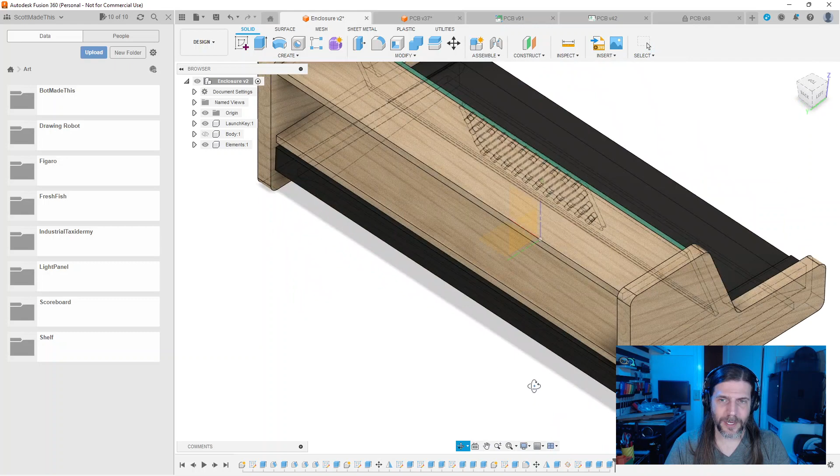To get a little bit more Jetsons-y. There's still work to do on that, but I think the overall look of it is so dramatically improved from this angle. I think we want to take that angle, whatever that angle is. I think we want to find it here as well. Not 1,000% sold on it, but I think that's something we want to do.

Two big things to address. There's certainly some more visual tuning that will just be a thing that continues in life. I kind of like that this pairs with this, that feels pretty intentional, but it's still a little too shoe-like or something. There's just something, I don't know, maybe it's fine actually. Definitely getting to second, third, fourth, and fifth guessing.

Some things we absolutely have to address though, some things critical to address. The most broken thing is there are little knobs in here and there's not enough clearance, so that's the thing that just absolutely has to be addressed. That is a failure, so we need to address that failure.

The second thing is an assembly strategy I was thinking about this morning, because joinery like this sucks—just a butt joint, a big flat plane, perpendicular is not great, especially with thin supports like this. There's a billion ways to do it and line it up and clamp it, but I could also make my life easier by building in some fastening positions, which will also help with fastening a front and back panel. I have an idea to do that, I don't think it'll be too terribly complicated.

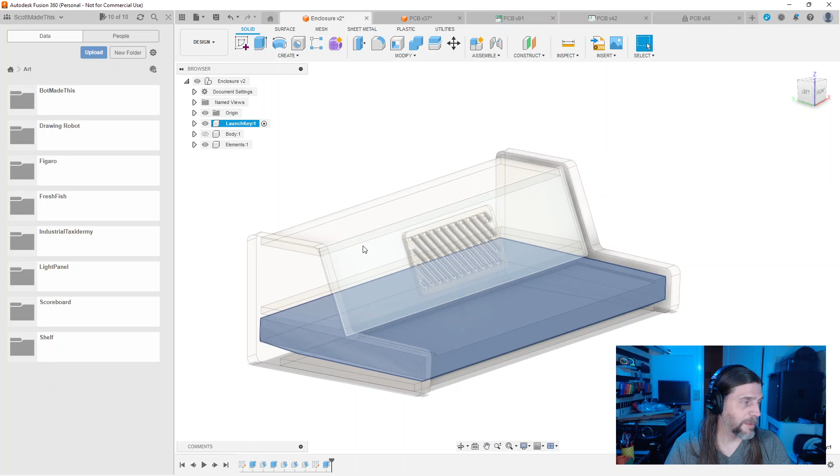Obviously all the Sudoku people are watching Skojo, as they should be. So we want to revisit this. I'm not sure why it's okay.

Anywho, so we ended up with two bodies here. One is the lower, one is the upper. Now I think we want to think about the placement of the knobs, and I think we want to do it relative to this surface. So I think we want to sketch just on this surface, just because we know it's at an angle, et cetera.

Top is not going to be right though. Actually, how do you do this? When you have made a surface like this, how do you frame it properly? Normally if I just go into the sketch, it will auto frame it. I don't know how to actually redo the frame because we're not looking straight down here. There's a little bit of an angle. I don't know how to do that.

Anywho, let's think about this. Fusion's going up in price next year. I should have purchased, especially now that... actually that would not be an unwise thing to do probably. Shoot. Yeah, bummer. Like I could buy it at the full current price, but there's no deals. Maybe there'll be a Christmas miracle deal. I definitely should have purchased this a month ago when it was half price, because now the half price deals are not going to be very good. Shoot. The good news is I don't have to pay for Unity anymore, so that's great. Still pay for Adobe, which hurts my feelings every day, because Adobe sucks.

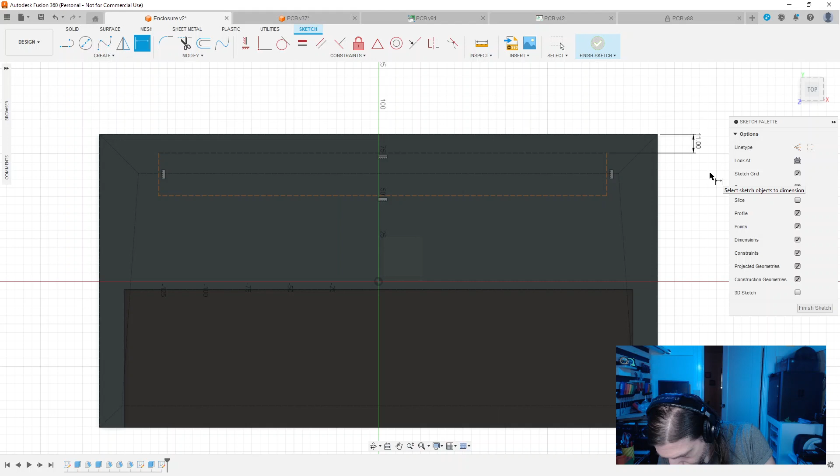So I'm going to exaggerate whatever I end up with anyway. So we want 11 millimeters from the top. We want something like, well, 81 millimeters from the side, from this side. And then this side. I don't think they're symmetrical, but maybe they are. They are not at all symmetrical. They're decidedly unsymmetrical. This is more like 84 millimeters on this side, 81 millimeters on this side. It's really like 81 and a half, but hey.

So 84 millimeters. And then the height of these to the bottom, a little hard to say. Let's say something like 9 millimeters. So that is kind of the layout of where these exist.

Do I want to actually bother trying to make some little knobbies here and extrude them, or do I just want to extrude this? I don't know. I don't really know the best way to do this. So if this was 9 millimeter, we could probably do something like this and something like this.

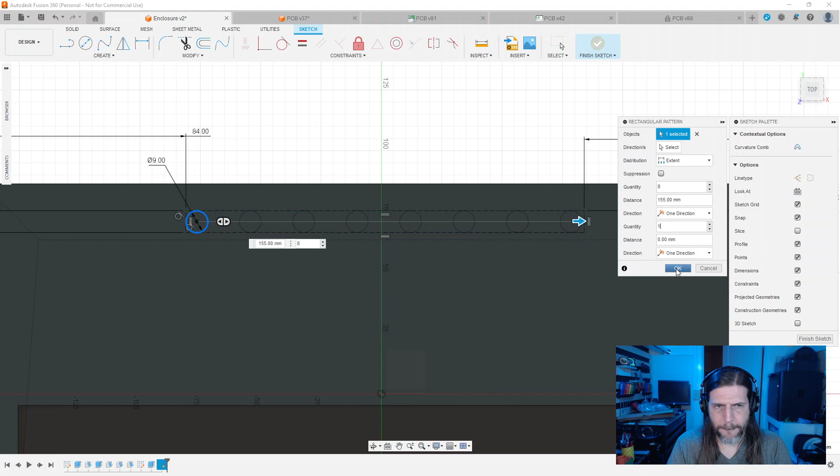Somehow that doesn't look right. Why doesn't that look right? Maybe it's right. That looks further apart than these really are. So that's 22.2 mil between. That's not even kind of right. What have I done?

So 8 of these, there's 8 of these, the full width of the whole party. Do I have some other measurement wrong? That would be amazing.

Let's try this again. That edge to edge is something like 81. This edge to edge is something like 84. That means this middle portion from here to here... Maybe I have the overall dimensions wrong and my whole thing is wrong. That would be kind of cool. 165. That doesn't seem right.

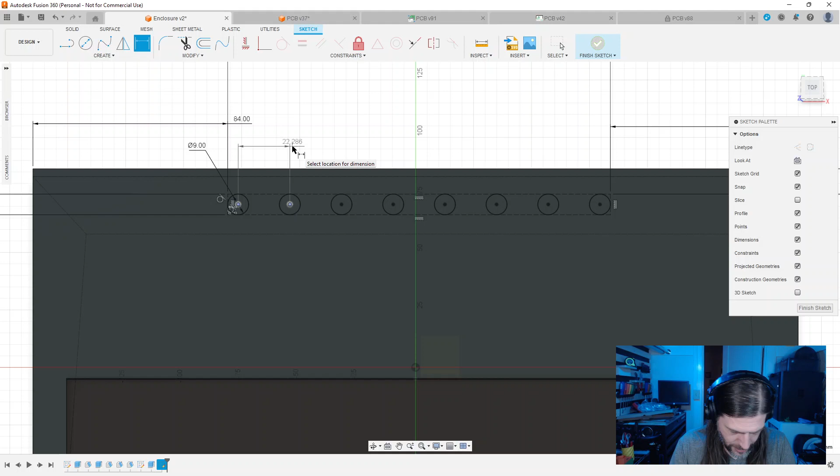So what, that should be 22 center to center. Maybe it is. Maybe this is right, 22 center to center. Maybe that's what I did wrong a moment ago. No, that actually seems right. Okay, 22 center to center.

Okay, never mind. Everything's perfect. I guess that helps reinforce my other measurements.

So the height here is what we're really concerned with. And the height is again something like 9 mil.

And this is where we're gonna see our sadness now, when we try to look at the whole dude, because I think we're gonna have a lot of intersection back here. And we do. Really bad. Super duper bad.

So we have a few options on this. One is to reduce, just make the bottom shelf not extend back that far. Or even have like a little cutout or something where those go, is one possibility. That makes that piece a little more annoying. I mean, otherwise if it's just a rectangle, it's easy to cut on the table saw. If I have this, suddenly dimensions matter a little more. Maybe cut it on the router.

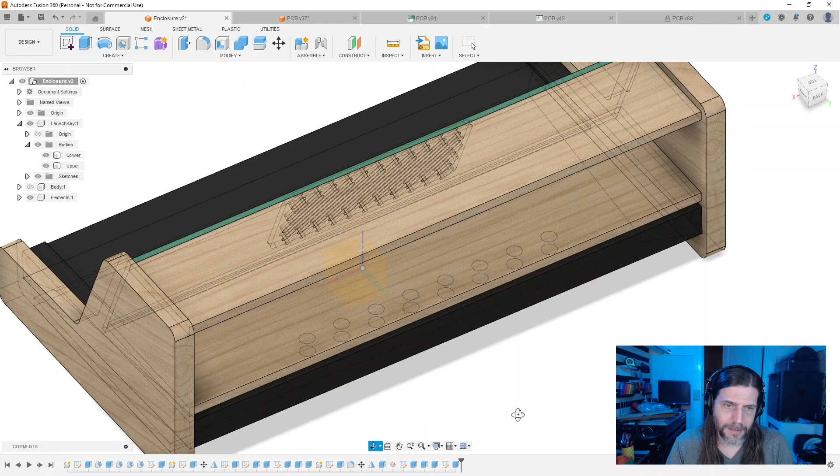I actually don't really want to raise it a ton, because that's going to make this internal height, which I hopefully get that part today, to think about what I want that height to be. But I would sort of prefer - so either this goes up or there's a cutout, I guess, is the takeaway here. But going up, it's definitely not ideal.

What do we want to do here? Could also just make this piece have less depth, which is a maybe. But then if we wanted to fasten something on the back, or I don't know. I'm also slightly worried about this dimension.

Is that a straight line, actually? So I'm just thinking about where a Raspberry Pi sits, and then really where the battery pack sits, because that is going to be big. What is this dimension? Oh, that's not right.

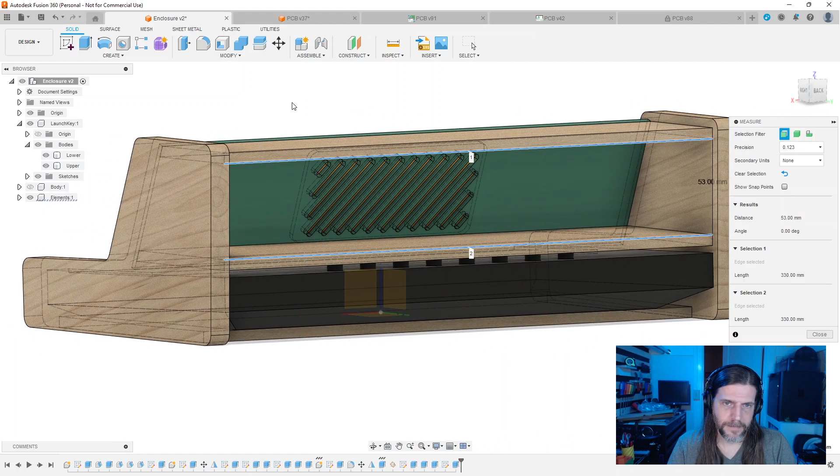Could imagine trying to mount all the electronics on the front panel. The angle that it comes in is a little obnoxious. Like the footprint of a Pi is something like 60 millimeters ish on the short side.

Gosh, this is way smaller than I think it is, isn't it? This height, I think, is actually a lot smaller than I imagine it is.

Because even this Raspberry Pi on its side, that's 53 millimeters tall. Raspberry Pi, if you count for the ports - sorry, even not accounting for the ports - is something like 56 tall on the short side, and then the long side, just the board is like 85. But once you account for clearance, it's close to 100 millimeters. Just if you want clearance on the sides, and if you go this way, it's like 100 by 60 or something.

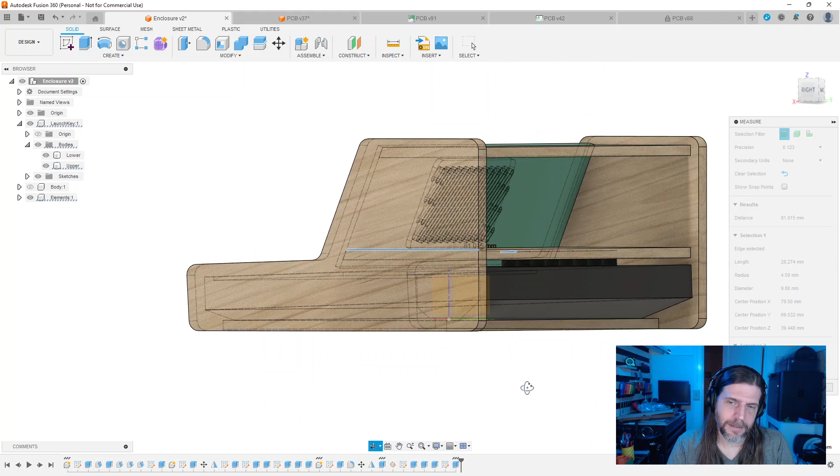Like, two things, I guess. This almost certainly needs to be taller, which is kind of a maybe. We've got to do something about this thing, right? Something has to happen with this - that's a requirement here. And then once that happens, we need to, whether it moves up or we do a cutout, think about the internal space we have here.

But there's really no reason that this can't come out substantially, right? Like this back piece comes out even more. And the reason I kind of like that is we know we have a minimum of one wire coming out of this object. And it's a big fat USB-B cable as well.

So, are there right angle USB-B connectors? Probably. Yeah, but I don't want micro USB-B. I want just, we need something like this, but we want it to be very short.

So we want something like this. Is that the actual angle that we want, though? We want something that goes up, and I think we want the exact opposite of this, unfortunately. That angle's down. We need to angle up.

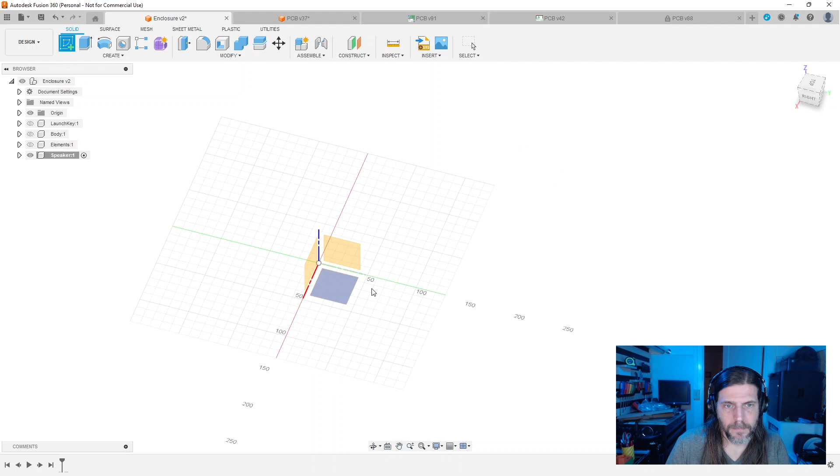Wish I could do. Can I do this? I want to. Anyway, we then need... just a rectangle. No, center rectangle. So this is 1.8 inches, and this is 7.2 inches, and then we need to extrude up 2.2 inches. So this is basically the footprint of this.

There's certainly a big fillet on these sides, like a really big fillet. Maybe not that big. But something like this, I think, is roughly the speaker. And then the cable comes out somewhere. Who knows where? Probably dead center, if I had to guess.

Why does this not give me a... Oh, it does. I can just barely see it. Love these setups. Love everybody's setups. Does anyone show the back of this thing?

Is that old versus new? Oh, the Bluetooth, I don't think I got that. Oh, an Anker brand. That one costs more. What are we looking at? Oh, it's Netflix. Does no one show the back of this object?

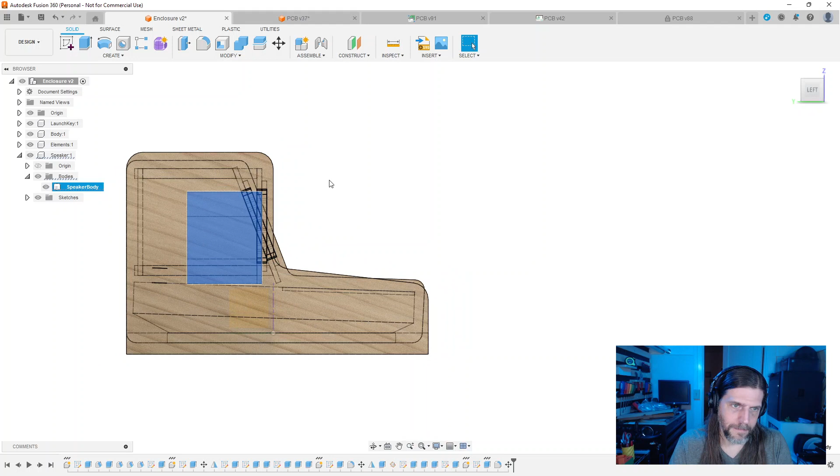Let's switch here. Move a whole component. So we're not outrageously off, surprisingly, just in terms of the height. This is a bit annoying.

Like, I do really want that angle, but we do have to make some sacrifices if we choose to do it. Yeah, and we eat up a bunch of internal volume as well. But it's honestly not as bad as I thought it was going to be. We have to make up this height somewhere.

So we need a little more height, and we need to lift that bottom piece. And we gotta think about where the battery goes. Like, I would want to put the battery just behind here, but I don't know — probably the wire just comes straight out of the back in a really annoying way, where it will be annoying.

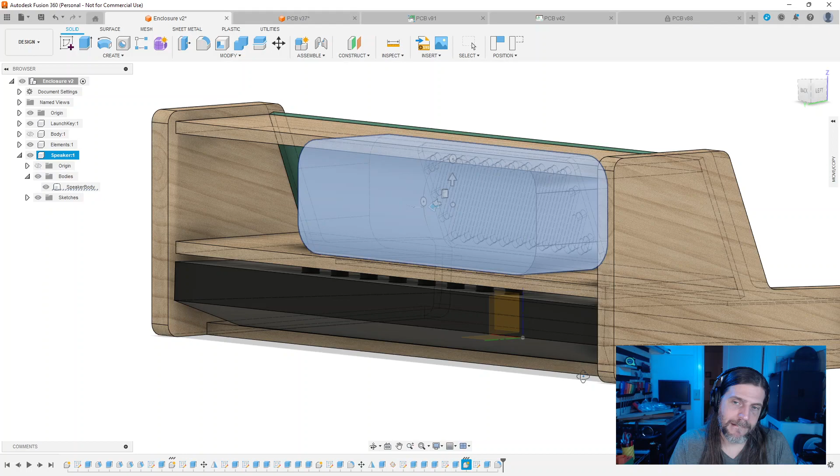That's another possibility, which is sort of tempting. Ugh, sad story. Just thinking about what it would take to have this flush, and then we can — but then, again, this still needs to move up. Or I guess it doesn't technically have to, but you know what I mean.

Oh, something just occurred to me, something possibly better. We will still have some internal volume problems, but I was just thinking, what if we didn't have this bottom shelf at all, and instead had some way to affix everything to the upper, with this upper angled on top. I don't know if any of that made sense.

Say we did something like this, where we still have some clearance. I think that angle is quite right, though I don't remember what we made that angle. Nobody does. Sort of afraid of that. What did we make that? It's maybe something silly.

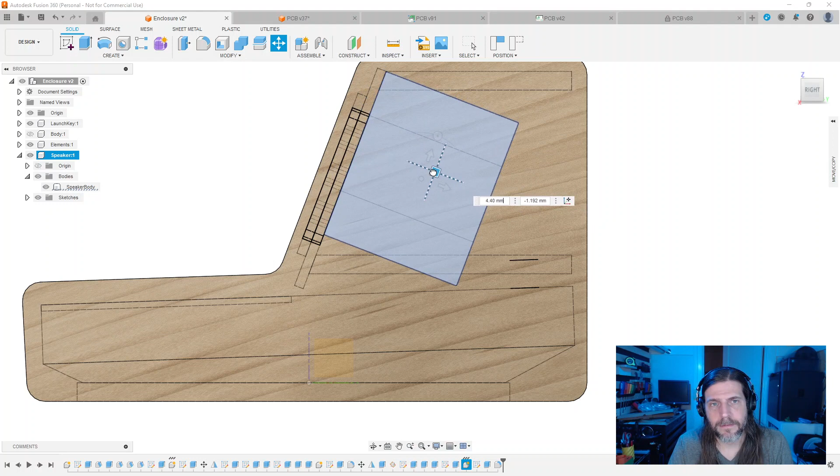Something like that. Anyway, I was just thinking about something like this. It does mean we'd need a way to suspend this, which would be possibly a little annoying, and that definitely complicates things. But it lets that kind of live more directly behind the grill.

It does complicate things. I don't know, kind of like that, but it definitely complicates the construction in a way that I'm not jazzed about. This just gets silly, and we don't have a bunch of open air visible behind the grill. It definitely was easier when the front was flat, but it didn't look as nice.

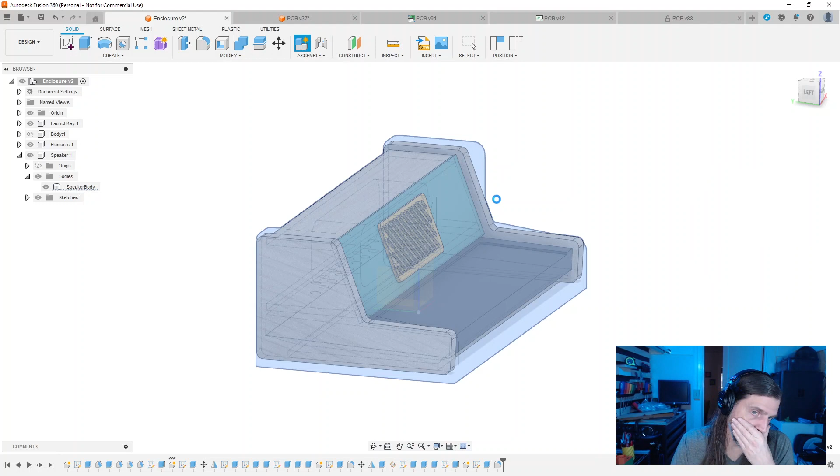So I guess let's just make the battery. Oh, that speaker takes up so much room. I already forgot what I said. 6 by 2.7, what? I don't know what I just did. I think it was related to moving the speaker, but that was not a good position anyway.

So we said 2.7 inches by 6 inches, extruded 0.7. And then we'll give it some fun fillets just for kicks, not terribly filleted, but... so then we had to put this dummy somewhere. Where does it go? It's a mystery.

That's funny that you think you live up here. Okay, ignoring the angle thing because I just don't know what to do. Oops. At this moment... I mean, ignoring a lot of things, a lot of flaws to ignore here.

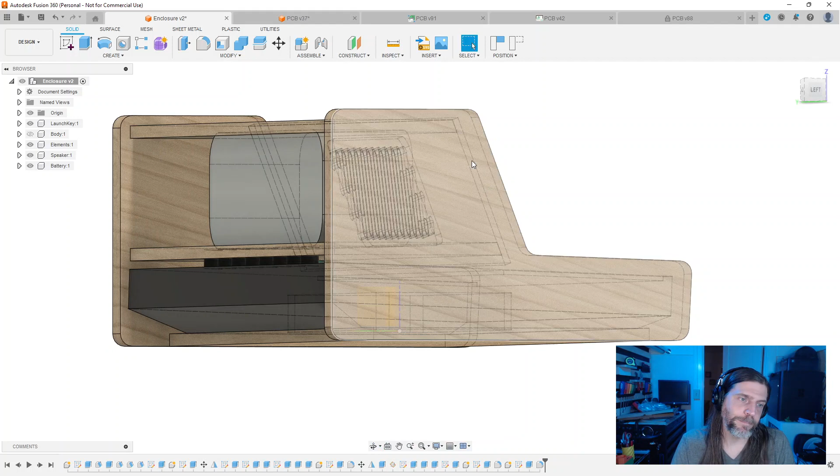And then the dumb battery, which is giant also, needs to be up in shelf land, and oh boy, it's big. See, I kind of like this thing. That is an idea, to use this as the size of what the height has to be. Other option is that the battery sits on top of it, and then that internal cavity has to be even bigger. Another option is this is just huge back here. I don't know.

Another option that I hadn't considered until this very moment—I don't really want to do this, but just to think through it for a second—maybe that's not the worst idea. Basically there's a panel on the whole back side of this, and this would live on the back with the Raspberry Pi, etc. That is a pretty efficient use of space.

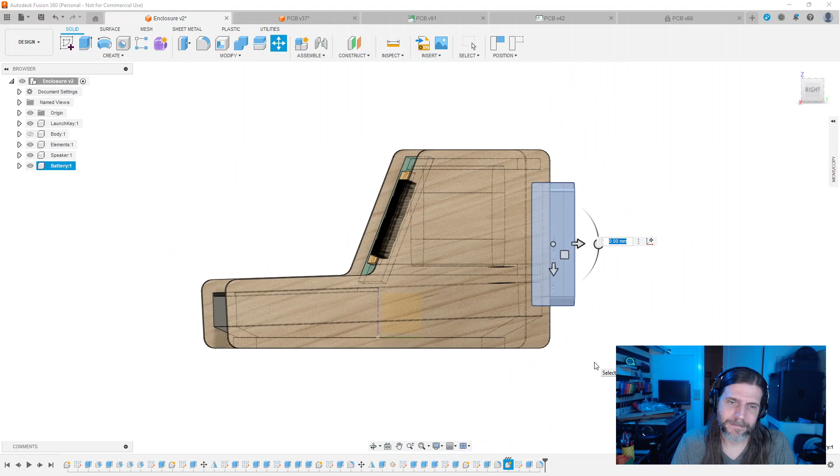But then everything else has to extend so it could be hidden. This still isn't solving some of the deep-rooted problems that still need to be solved, but, just spitballing here.

Shoot, I lost my battery move. You could kind of imagine this shelf. How would we do this? So one problem we have is just interference with these, right? So one idea is just cut that off early. Make this taller.

And the battery lives somewhere. Just don't want to add a ton of complexity to this. I like the idea of just having this cavity to stick stuff in, but maybe our stuff is too big.

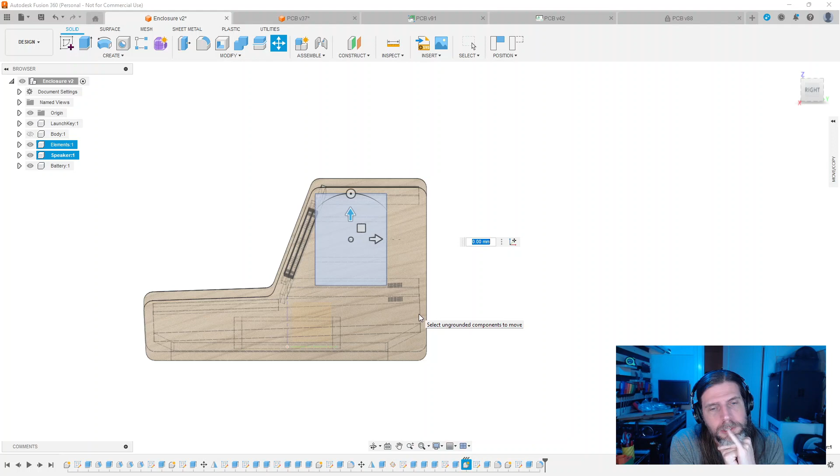We do still have the annoying issue of the knobs, which is an issue we haven't really talked about. Yeah, I talked about it but didn't address it. Like the joinery for this bottom piece, the joinery for the pieces that go in here, that stuff is still annoying. And we still haven't really talked about the idea of having other electronics on the front panel.

I guess we have a slight advantage of this little trough here if we wanted to do stuff in there. You could even imagine just like a slot where those knobs go, but it's got to kind of slide in from the front or the back, one or the other.

Lifting that is definitely the easier option. It's definitely annoying, but instead of having any other kind of slots or what have you, it's just a bummer that it has to lift a lot. So that would be in here.

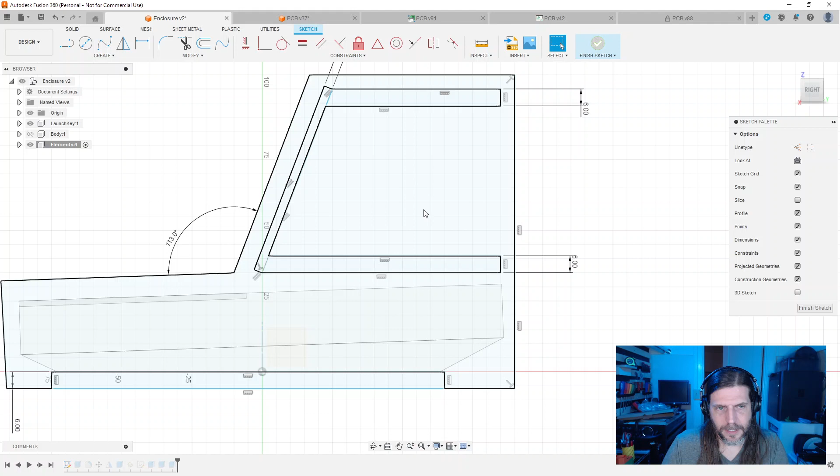We already said that this could extend past, didn't we? Did we actually already do that somewhere? We did, how did we do this? Did we do that in a bad place? Oh no, we drew a plane on there and all that kind of stuff. Right, so it was actually... we didn't even use this. That is not even a thing we used.

I kind of want that line just as a construction line, but I don't know the best way to do this. I want this angle to stay the same. Can I make these, force those to be parallel? Then what happens if I try to do this?

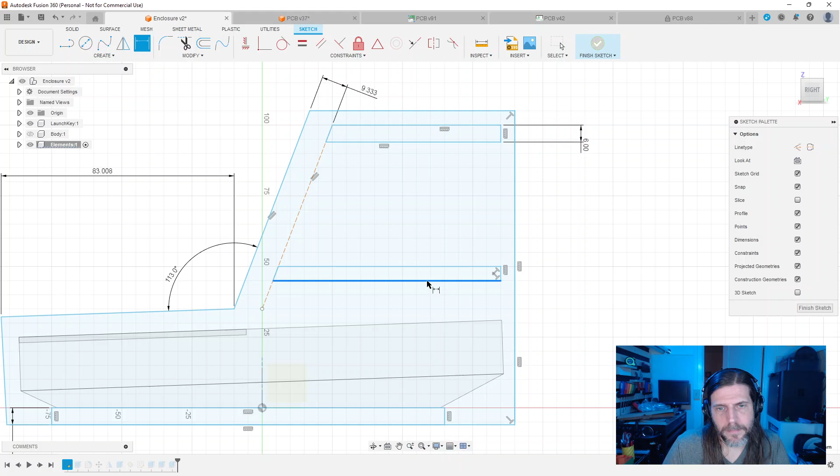Because I think I basically need to just... this is going to screw up a number of things though, sadly. Oops. How bad is Fusion... is this gonna like... okay, that's okay, I feel like that just broke 1,000 different things.

Can we just make this a number that makes sense and say it's 10 mil? Or does that mess up everything? Messes up a lot of things. We're definitely going to want to redraw this. Okay, so this is going to break so much stuff, I think.

Right, because we've got to fix this extrusion somehow, and also adding that. But then this is not happy, this line and this line. Okay, definitely broke something. I think our plane is now facing the wrong way, which is kind of funny.

So, and then now we have to fix that one, and now we have to fix that one. Okay. Did I actually move that up enough? No one ever knows. But one thing we can definitely say, what do I have?

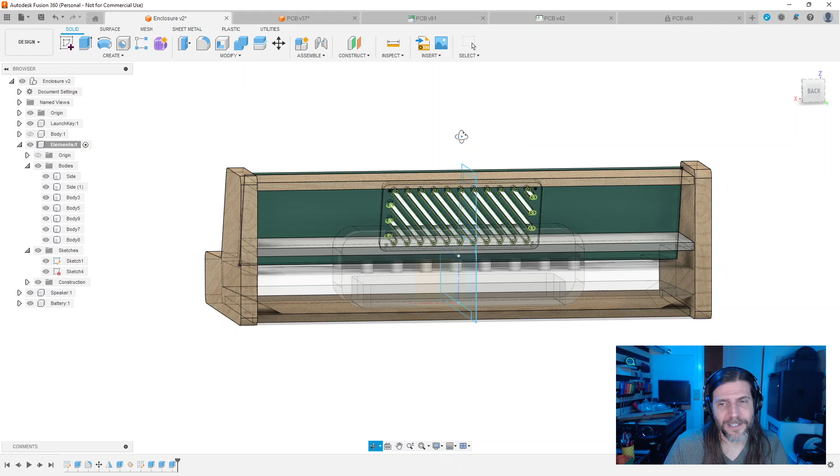Looks like there's some intersecting geometry. Oh, I guess, yeah, gosh, probably because I made this the exact width of the, oh, rookie mistake. The exact width of the keyboard, so that for sure has to be addressed.

That would be when I moved this over. That was too much, obviously, but it's annoying that it doesn't keep my existing, let's call it 2.5 mil. And then these extrusions then need to be 170, and that gives us a little clearance on the sides.

No, that was much too much. What happened here? Let's just be 167.5. Split it, okay. So that's... was that still not high enough? I will cry. No, it's actually too high.

I don't know what to do about that though, you know? Like, can I just... if I move this, what happens? Probably all the wrong things. Yeah, it's really annoying. I want to move it kind of along this line, basically, I want to slide it along this line and not change anything else. I guess I can do it the cheater way.

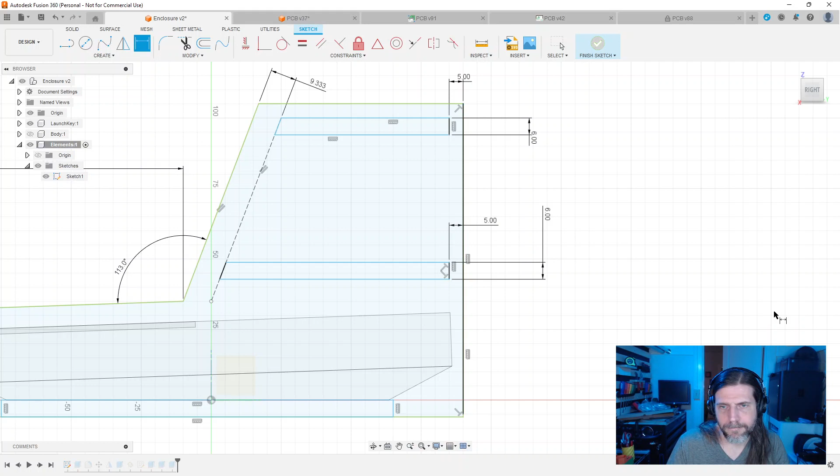Something like this, I don't even know. Let's just call that 5 for now because I don't quite have a sense. So that gives us an air gap in there. And now this upper portion is obviously way too small, and the positioning of the grate is no good.

We need to make that its own component, probably, just so we can work on it in a more sane way. Anywho.

So if we go that route, which, hey, it's a route, then the top needs to be so much taller, basically to where if it sits on this shelf, then now the interior needs to be basically where that top portion is, plus some room, right? So this line has to go up to here basically, which is a lot.

Probably should have modeled this speaker before I did all this stuff, huh? Oops. Oh well, it's learning. We're learning here.

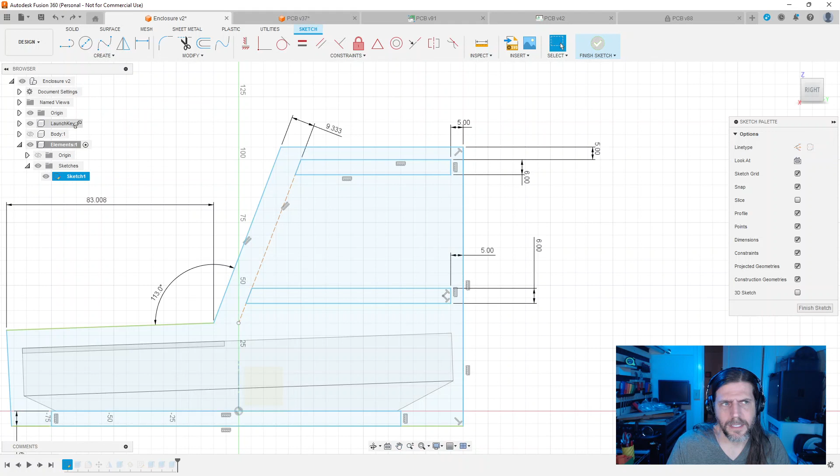I don't know what this double line on the back is, but it doesn't look good. What is that? Where did that come from? Did I just accidentally have some kind of double line? Apparently. Or was it just drawing a double line? Who can say? Okay, well, did that actually do anything? Nope. What is this double line? Is this the bad line? What are we doing here? I don't know what this is.

What are you? That's not 90 degrees. Dang it, hit the wrong button. Can I extend this to you? Okay, how about this? Does not quite seem right, but that is 5. I don't know where that double line came from. Who can say?

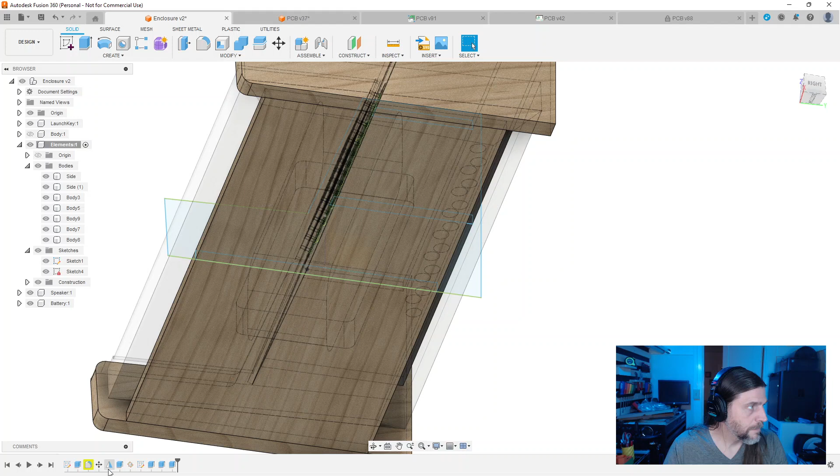Okay, are we happy now? Almost, we have damaged our fillets. I don't know how to reselect. Okay, I'll do this. I don't know why I can't select those. Oops. I'll just take a stand-up break. I want to do these fillets, and then I'm going to run around. It's pretty annoying. Just select them all again.

Like those 6mm fillets. You know what we could do? We could take this angle to the back as well, have a lot more internal volume in our little hidey hole.

Okay, but just after doing all that, does the speaker actually fit? Because that'd be a real triumph. Snug, but possibly okay.

Yeah, and the thing I was just entertaining is the idea of extending, basically taking this line here - we missed a fillet back here - and then we would get a lot of internal space here if we mounted stuff to the roof of the doodad, which is not perhaps the worst idea.

Still probably doesn't fully solve the battery problem for us, though. Annoyingly, tragically, sadly. Okay, I'll be right back. Excuse me.

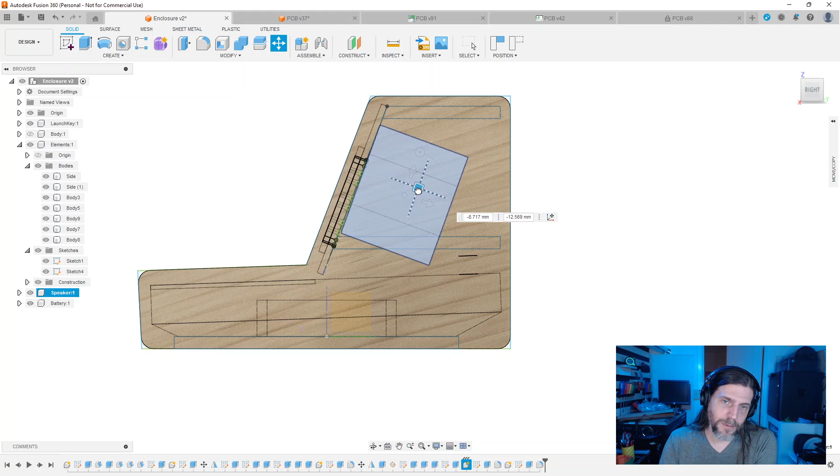This would need to be kind of more structural then, probably, but definitely way more complicated than just a shelf. Like a shelf is certainly very easy. But I do kind of like that idea.

Well, let's try a couple things.

Somewhere this has a parallel constraint, but I don't know whose. Or is it this? What kind of constraint is this? There's a perpendicular constraint here.

Definitely struggling. I want this to be like this. But people are mad at me. Let's turn these off for a minute, just while I'm trying to figure this out. So what I want...

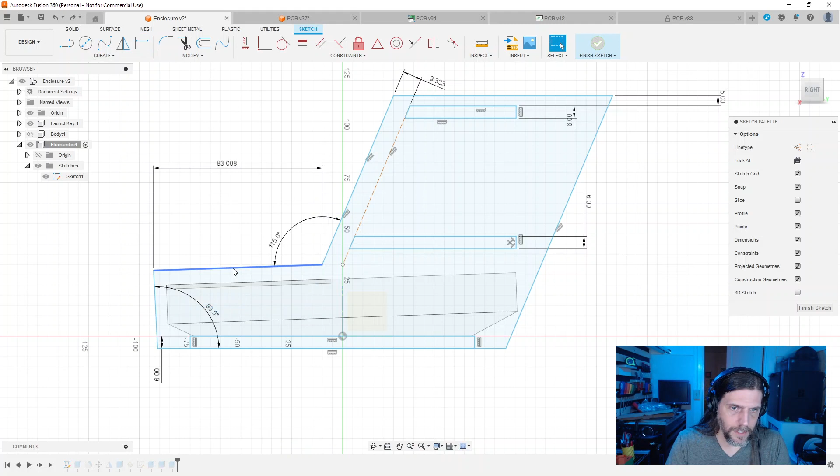Do I have like two layers of lines or something? Oh, that's the box. I have some relationships here that are not serving me well. I don't want any of this to change, I just want—oops.

I don't really understand why that's making—oh, it's because of this distance. That's my problem, don't do that. I do have a bit of an angle here, which makes things kind of silly, because that means this isn't really 115 degrees. I'd have to think about that a little. Maybe that's why it was 113. Because whatever this angle is, who knows?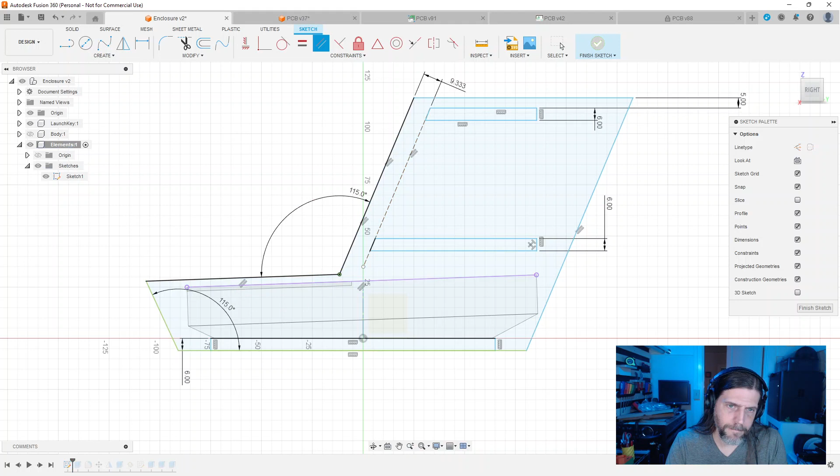Bump that back slightly. Insane things are now happening to the bottom here. I don't know, I kind of preferred this line following this line. Get rid of this and just let this be parallel to that. There's problems here, I got up with those little feet. There's just so many little details. Good boy. Okay, what does this look like?

How dumb is this? It's kind of cool. There's lots of details that make it more difficult now than it was previously, but the proportions are not bad.

Okay, let's finish that interior jaunt. Problem is, the more complicated I make this, the harder it's going to be to make myself really build it. All these details, especially all these little angles, just make the fabrication harder, and that's going to draw out the process, making it more likely I never finish this, which is not what I want. I want to finish this. And already it's so much more complicated than it was in the stream last night.

It was a pretty easy object, but it obviously had invalid elements. So what do we do? I'm just making it more and more and more complicated, is my concern here.

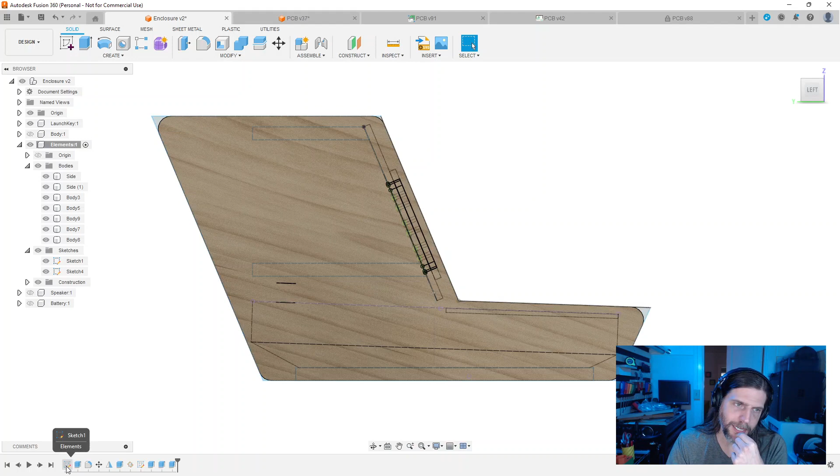So that clears that. We decided the speaker was big enough. We could pull these to the back now. Not actually enough clearance in the back as I think would be good. To decide if I really care about flattening these or matching the angle on the back—it just gets annoying, versus just leaving those as flat boards.

But that gives us a fair amount of internal volume. Does make me worry a little bit about it just falling over backwards. But it won't, because if you think about whatever this object is, wherever its center of gravity is, I think these little dudes will counter it. I don't know if what I just said makes sense, but I think it maybe perhaps possibly makes sense.

The grill is definitely bothering me, but I have a really easy way to address that. I'm not sure that I do.

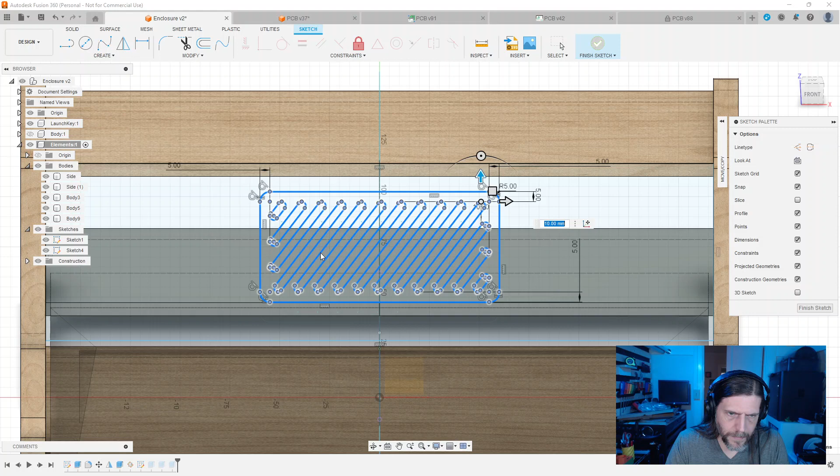I mean, that's technically fine because the holes are above, but... well, that's exciting. How did this happen? What? How did you decide not to grab those? Hello? What?

What happened to these? Did I screw something up in moving those? Guess I did. Still screwed up, for reasons I don't understand.

Okay, unlock everything. Oh boy. That looks like every single thing is selected. I'm just gonna go out here and see if it's working right now. Appears to be okay right now. And then go back in.

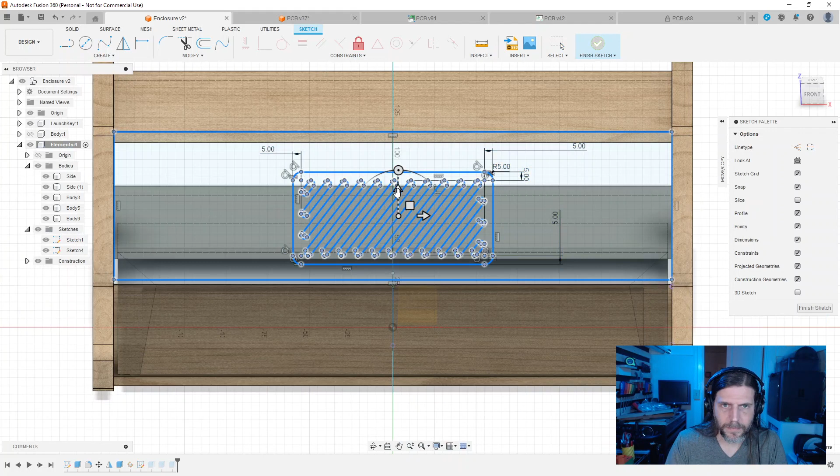Grab these. I don't know what this line is. Some reference line that I pulled from somewhere. Oh, I must have had some external rectangle reference. Why can't you move? Do I have some distance from that line or something? That is relative to those dudes.

Oh, that's not what I wanted. That just breaks the... Come on, buddy. I wish I had a better strategy for these vents.

What are these points? I don't know what those points are. The top line seems locked somehow, and I don't know by what it means. There's some measurement that I'm just missing. Oh, I tried to add this measurement. It was bad.

Yeah, it just breaks everything. Why can't I just move this? It's pretty annoying.

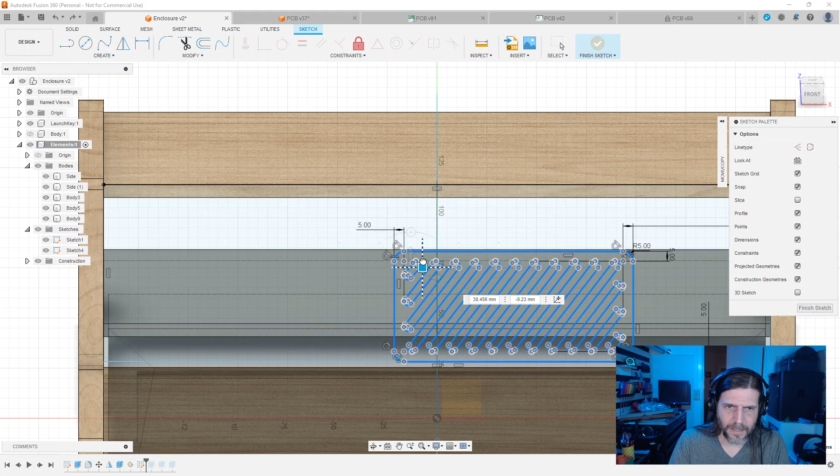Why, when I move this, does it now break my extrusions? Anybody have thoughts on this? Why? This looks fine, except it doesn't actually. Like this appears to be a fully closed object, and for some reason this doesn't.

Like when I move it, somehow a little gap is introduced or something. It's pretty cool, it's a pretty cool thing to happen, which sounds like definitely a thing Illustrator would do. It's like extremely something Illustrator would do.

Is it true? Are there dumb other little pieces over there? Probably. Little extra points or something. I don't know why there are extra points actually, but there are.

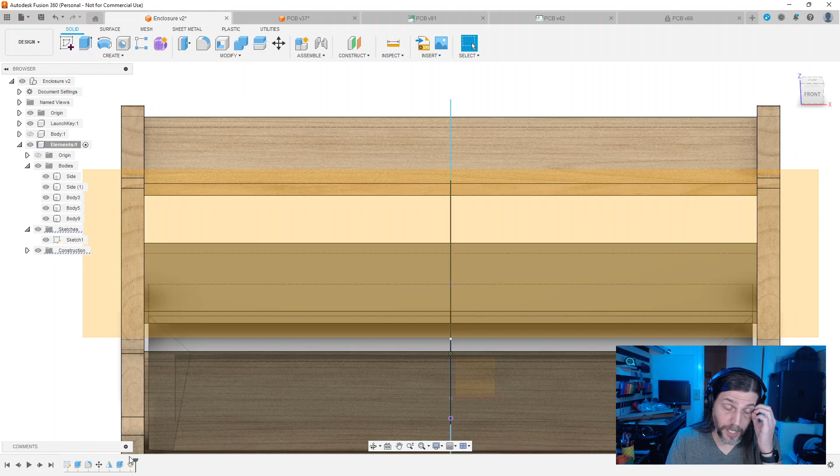It's a very cool plane. And then we decide to draw a sketch on this new, very cool plane that we just drew. Where's our cool plane that we just drew?

We're going to sketch here, and we're gonna draw a rectangle. Something like this, I think is what we did before. Right? And that is how we created our little 3mm doodad. Something like this.

And then we wanted to try to insert our DXF on this surface. Like, this process is not good. Awesome.

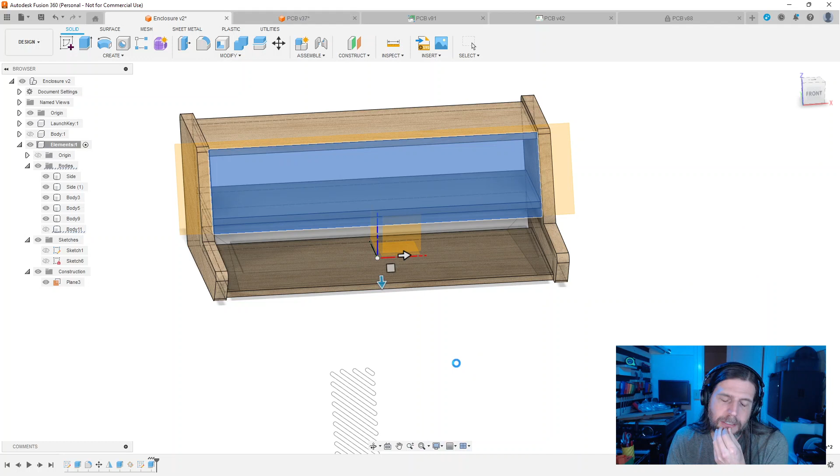Ah, boy. Why? Why must you be so stupid? Let's try a new strategy, because this strategy is annoying, and it's not going to serve us well in the future anyway.

How do you do the delete after marker? Why is it not working?

Okay, let's just make a new component that is the front panel. New component that is the front panel. Front panel. And let's just...

What did you just draw that on? That is not where I wanted you. I specifically didn't want this in here. Did I not select the...

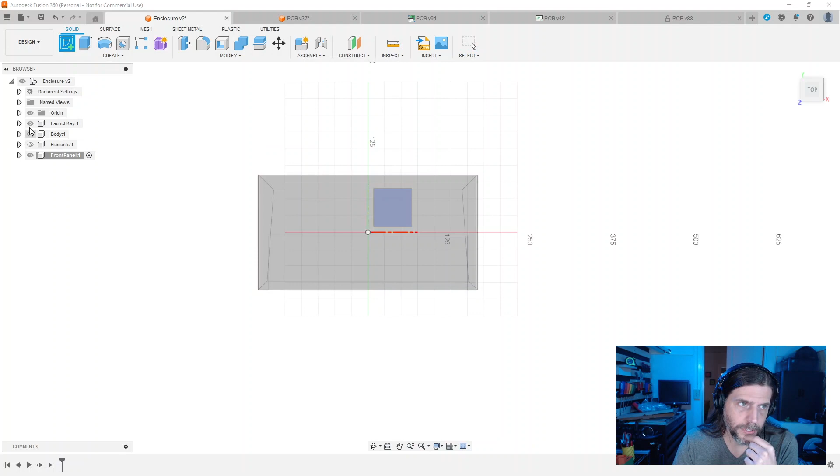I'm going to create a component, and I want the parent of the component to be you. You. Dummy. Okay, create a new component. Parent, you. And then now, create a sketch on this surface.

I have no idea what this number is, but we'll figure it out. Once we do this, we should be able to go back into enclosure land and affix it, which I'm not very good at.

I have too many of these. Gosh, remember how easy it was when it was just a box? Should we go back to that? Let's just look at that for one second. Look at that, it looked pretty dumb, but man, it was easy. It was really easy.

I don't know, this definitely looks cooler. So we want to assemble... I'm very bad at this. We want to connect this point.

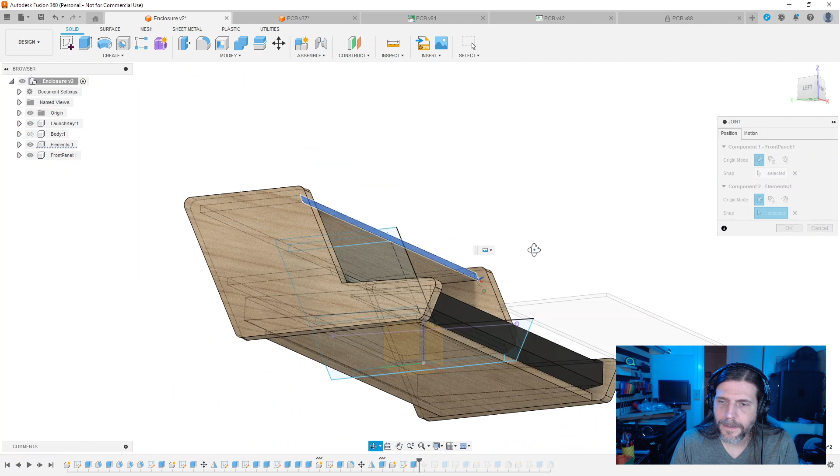But actually, no, we want it like this face. Can we do that? Okay, almost. Just A for effort.

It's more like we want between two faces, two edge intersection. But I think it's kind of like, oops, we want, dang it, joint. I definitely don't really know what I'm doing with assemblies, but I feel like we want the center point of this line. I see you. And we want the center point of this line. And it's almost going to work, but then we're going to have like a rotation problem.

So the simple version would be like here, which almost works, we just put 115 degrees here. That is about right, we just made our thing too tall. And it's apparently not 115, it's at 113.

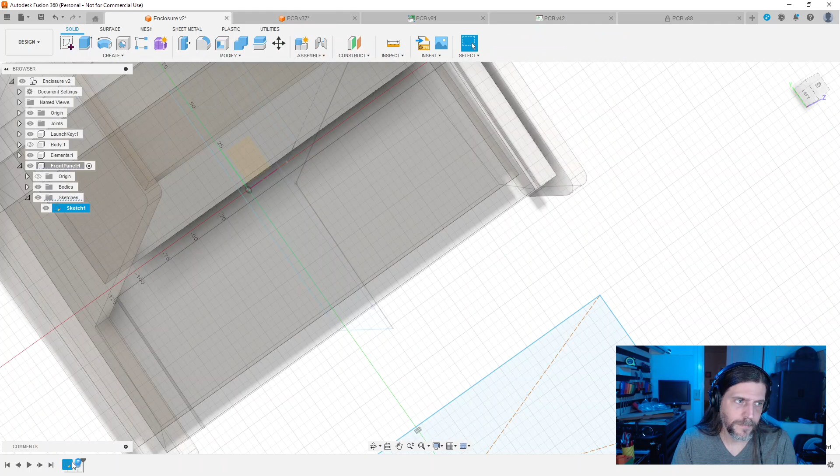How is this? Okay, that is very close, probably too close. But I'll go with it for just this minute. And then we can try to just put the DXF on this sketch, and maybe that will make things a little easier, I don't know.

Insert mode, one sketch per layer, single sketch. Okay, where are you trying to put this? What insanely dumb place, why is it up there? Why? Impossible to say.

This is like 330 divided by 2. Negative 330 divided by 2, something like that. That does not look correct. Is it not 330 divided by 2? 360 or something? Don't do this to me.

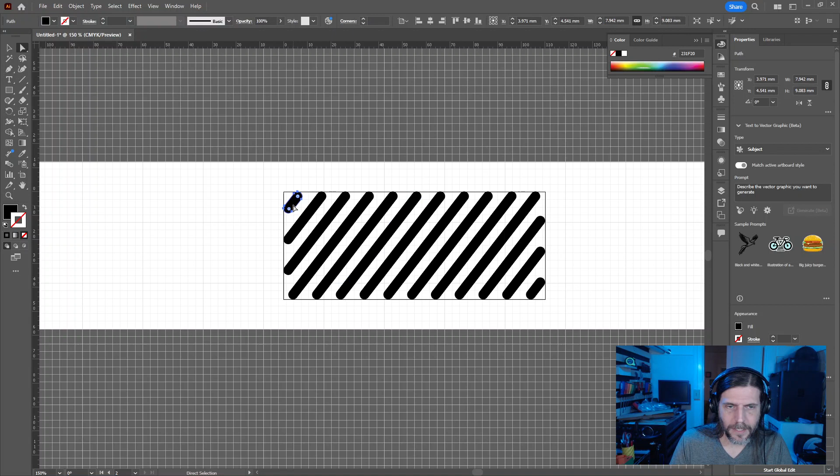That makes sense. I don't know what this line is. What are we... is this the whole artboard? Then what is this line? Is that screwing things up? What is that? Are we drawing something we shouldn't be? What is this?

Is that the artboard? Did we end up with two artboards or something? We did. That's... that makes a little bit of sense. So then... oh.

Why are you like this? Oh my gosh, Illustrator, you're so stupid. It's so impressive how bad you are.

What a snap to point. Why did the stroke size just change? We only want to snap to point, nothing else. Snap only to point, thanks. I don't want a pixel preview. That was my fault. And then path, offset path.

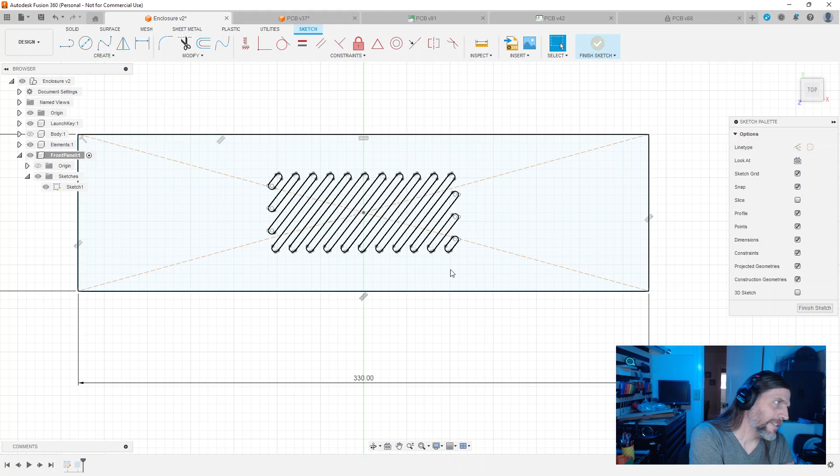What I would want with this is almost like a reference, like where it's just some reference to a thing that exists elsewhere that's really easy to move around, as though it were, you know, so you just sort of scale it, move it around, all that stuff, but it's not what we have. Like, and also being able to position it relative to something would be real cool instead of this.

Why are you like this? The positioning just sucks. There's no... it's stupid that it changes, if I move this and then try to change something, it resets it.

Like it resets the move. And then now I'm... I don't know if what I'm saying makes sense here. I am relative to nothing. It's very obnoxious.

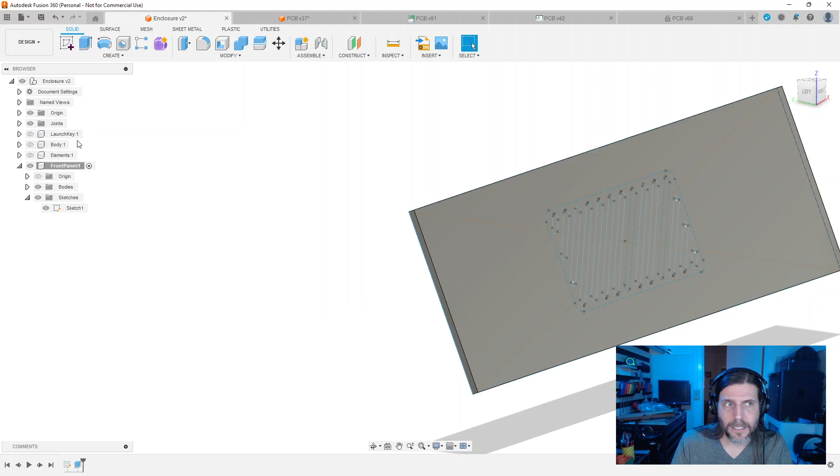It's acting like those are not closed paths, even though they really look like closed paths to me personally. Oh, also, did it not put the sketch where I really wanted it?

Hang on. Bafflingly, two of these end up as fully enclosed and the others don't. Why? Why, everybody? Why is everything so stupid?

There's some fun setting here that's like close everything, you dummy.

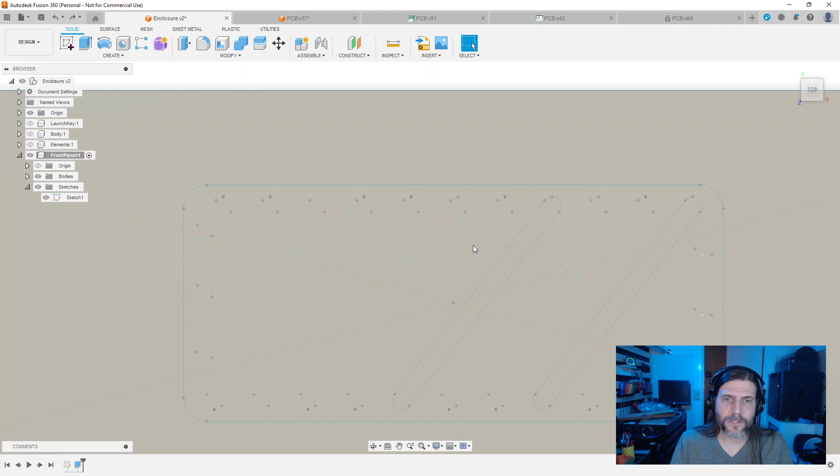I never should have opened Illustrator. Never should have done it. Just don't really have the full sense of the best way to do stuff like this in Fusion. It feels like Fusion just needs a tool that is like the grid tool or whatever.

I would like, I think, just to make another sketch. Do I want to do it on that surface? I don't know. Kind of want to, but I may regret this.

Okay, we do this. Make a sketch on this face, on you, and insert DXF on you.

Still positioned in some bafflingly dumb way. Appears to be upside down. Who knows why? Who knows why? It's just not very good.

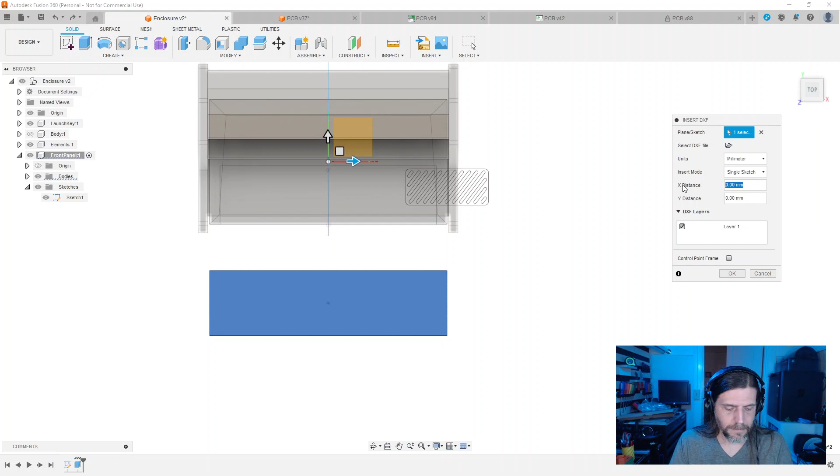I hate this. No. Okay. Then just do whatever. Something like this for the moment. And please let me select you.

Okay, and now we want to extrude these backwards. And that's exciting. And then now we want to extrude this upwards. And that's exciting.

Hope we actually place the component there and not just a body? Like when we created that joint, was that created with...

Okay, seemingly that's all good. I don't know what any of this stuff is. We just delete everything after this point. Is there not a way to do that? I thought there was a thing that was like delete everything after. Yeah, delete all features after history. Okay, that is arguably better.

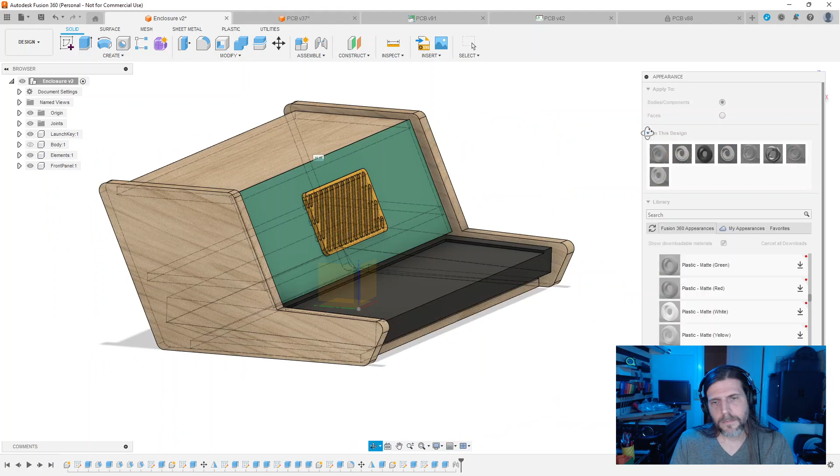I feel like we've done a lot of work and not actually gotten much closer to what we need to be doing. Just a sad story. Because I don't think this actually helped with our problem of the battery, right? Like the battery is still...

Oh, oops. I think some of the things I deleted were the battery and the speaker. Okay. Oh no, does that mean I did... that was the battery, that was the speaker.

Where I did the... I think I did the knobs in the wrong place, annoyingly. But it's not that important. Okay, do appearance again.

Every time I use Fusion, I learn more about how bad I am at Fusion. We have two panels, so this needs to go. So this needs to go. So this needs to go. And then maybe we're back in business.

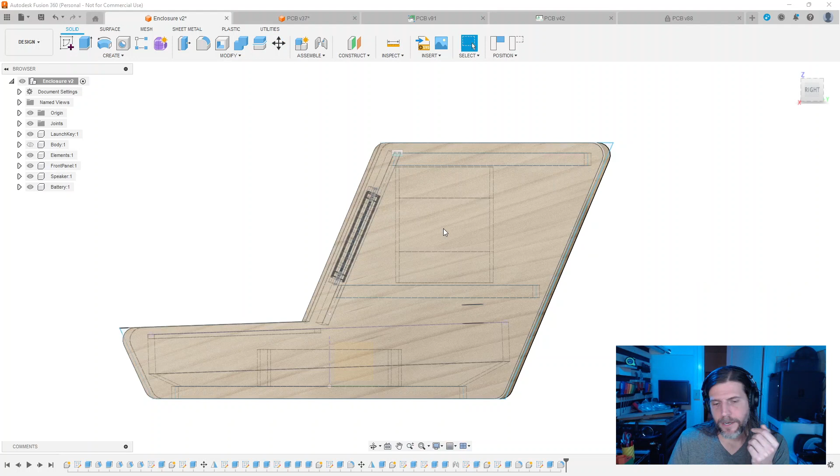The speaker and the battery are giant monstrosities, which I don't exactly know what to do with. Making the battery tall enough, sorry, making the enclosure big enough for the battery to sit in there is concerning.

Oops. So that would, you know, there's a world where this just fits in here right now. There's also a world... just imagining something silly.

Oh, battery, you're so big. You're very large. This extra space that we got from that, the diagonal going backwards, just doesn't actually help us that much.

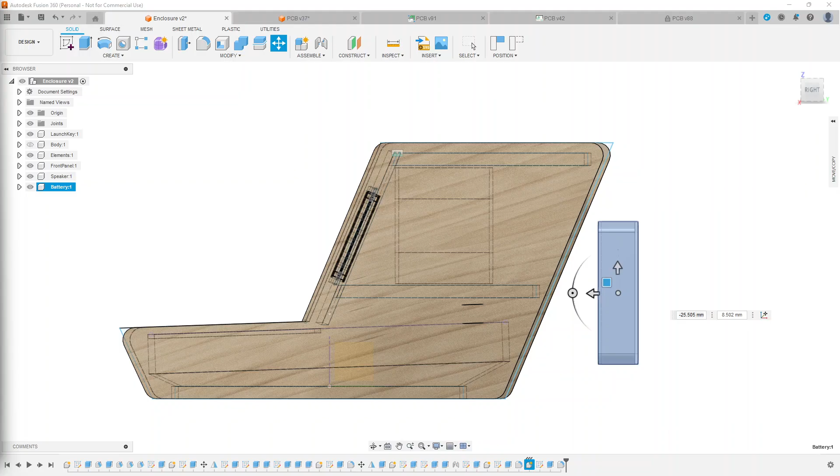The thing I was just imagining is that, and this could actually really simplify things pretty dramatically. I mean, just seeing it, it's a little guy, it really is not very big. So, right, all my lamentation about the more complex angles and so on could be avoided if we built this as a box, like there's an internal box.

We definitely sacrifice some things because of that. I kind of feel like I just need to redraw this and think about it in a different way, but basically we'd make this a right angle, is the gist of it, and then there'd be a box in here that was truly just a box. It's just a box, and there's no angles we have to worry about. It lets us put the speaker in a way that makes a lot of sense.

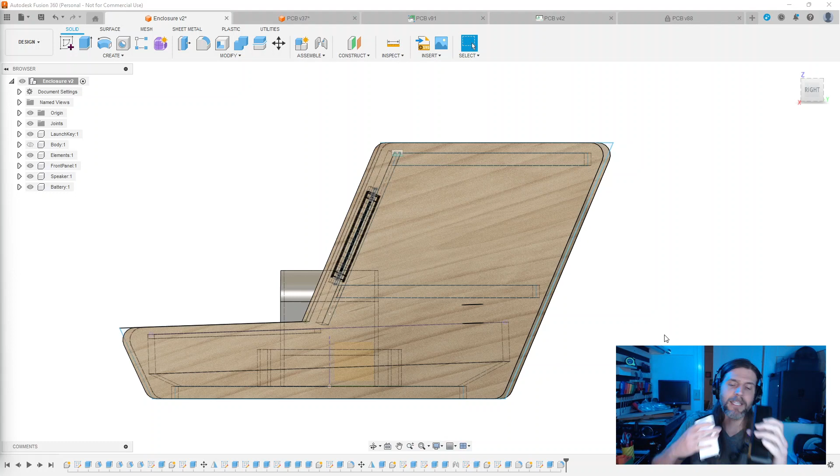Or it's big enough. I mean, that gets very big though, in terms of what the battery's doing, that becomes a large thing going on.

Another option is that we kind of cheat and the battery just sort of sits in the back of this, against the back of this, because we need a little clearance in the back anyway for the USB cable. We know that, we know that to be true.

So it definitely could be built such that... okay, I feel like we're getting somewhere. I just don't know where it is. I don't know where we are, but we're getting somewhere, in terms of this reasonably living here. Does not have to be that big. Depending on that angle, just to be sure that it can clear, because we still have to clear the doodads, which is annoying. No, those things.

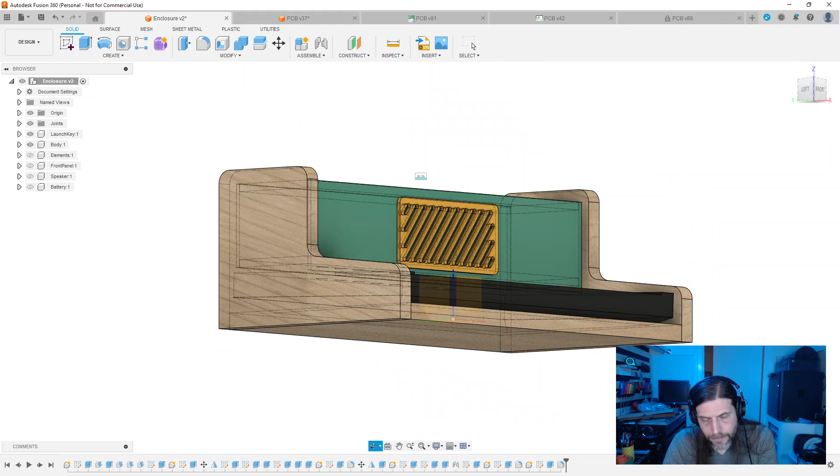It's just so much simpler to have a front face there. You could still have the body come out backwards, I guess, if you really wanted to, but oh man, it looks so much cooler.

I guess, what is it? I don't see any fasteners on the speaker, so it's presumably all glued together. So disassembling the speaker is maybe not gonna happen.

What do I want to do? The whole point of picking this approach was to not get stuck. It's kind of a bummer. I chose this approach thinking, okay, I can't decide what to do for just a standalone enclosure, so we're just going to build this hat for this. And it seemed like we were doing well, but now I have all these annoying considerations.

I guess it's worth stating that it is not a requirement that the front of this is flush with the front of the box. That means I need to hide what's going on inside, but it's not a requirement. And then it is not a requirement that it is battery powered.

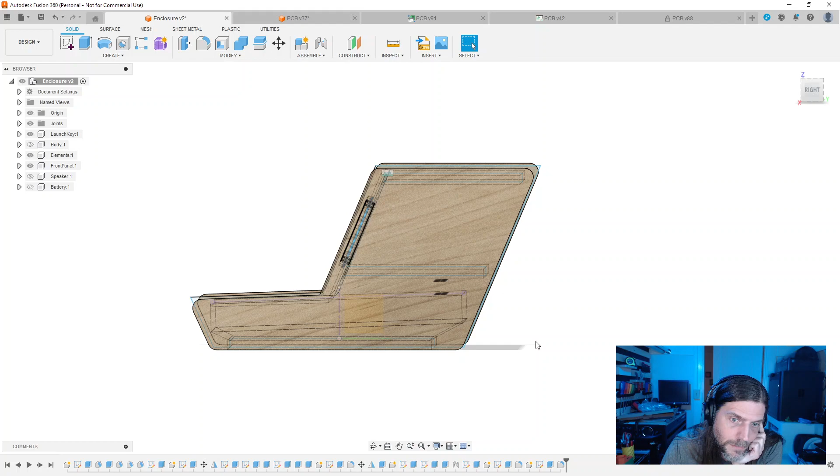Ugh, my indecisiveness ruins me. I need this to just be done. I do actually kind of like the suspended box. It just means that the speaker's going to be up pretty high.

Which leaves so much wasted space down there. We don't have a ton of lateral space. The idea of the battery and the Pi being on the back - what do we think about that? So we need like a flat region here.

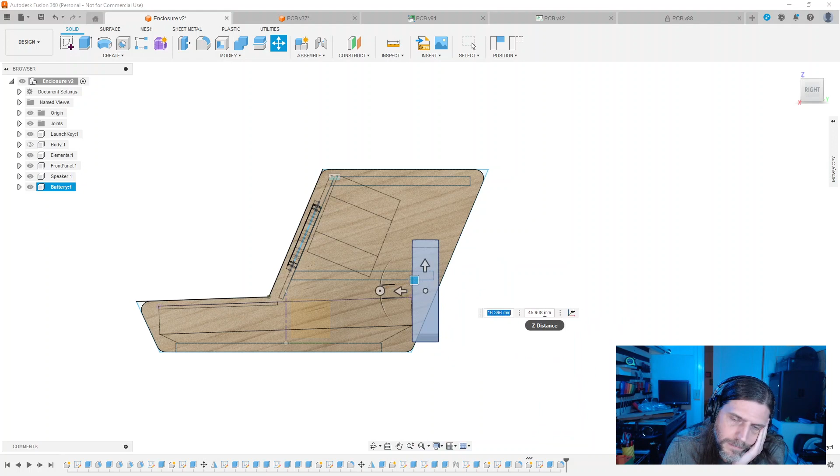Basically we'd be saying like this, and the battery's on one side and the Pi's on the other, or whatever. Which maybe if we do this diagonal here, then we don't really need a bottom shelf. And then this can be flat. It makes that joinery a little annoying, but not outrageously so.

Like, if this goes flat, you kind of want this to stay a 90-degree angle. It doesn't have to - this could go flat like this, and then this angle could be obtuse. And then there's stuff, and there's room in the back for stuff.

Just get rid of the bottom. That could be fine, actually. If we didn't have the bottom, the speaker was affixed to the top.

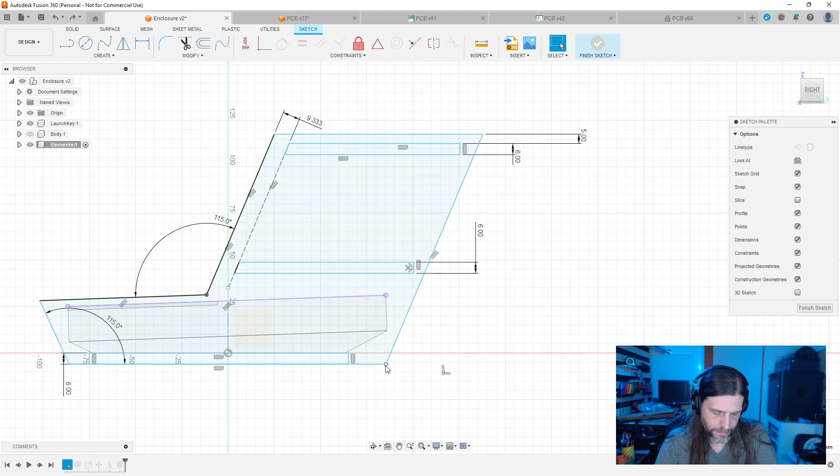I don't know how much that needs to be, but say it's something like that. We would no longer say that this was parallel to the front, and we would say down here that this is 90 degrees.

Oops. Great. I don't know if it's going to let me do this. It did. Okay. And then this needs to drop down now to something to make the angle that we've created appropriate, so this is not perpendicular. This needs to move in here somewhere.

And then we're not going to say that any of this stuff is straight. So what we want to say is, I guess, these are parallel to this, and that this is parallel to its little buddy. It's impossible to click on. Oh.

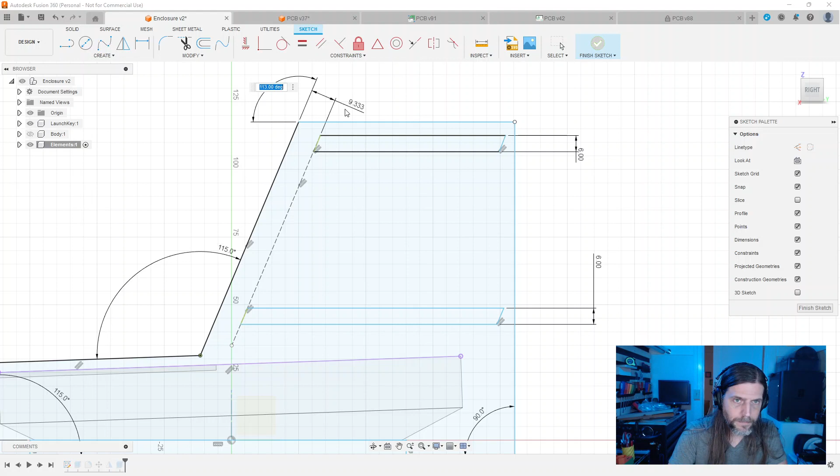Something like that. And then, I know this is all a mess, but shoot. Something like that. And then...

Now this and this want to be perpendicular. Oh, why did those end up so close to the top? But then I like, can we just not have this other one anymore? Just not need this anymore?

So there's lots of measurements here that make no sense, but just ignoring this for the moment, something like this would be a proposal. We'd probably want to flatten this piece out, but this is probably going to wreak havoc on our everything. Actually, wasn't too bad, shockingly.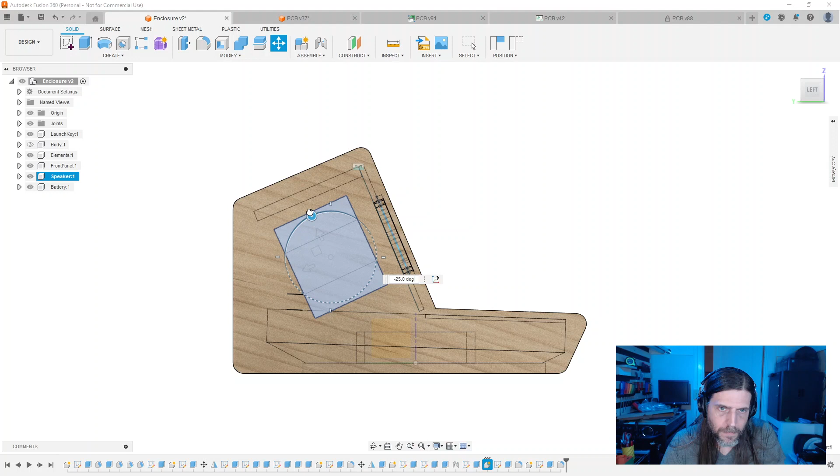So it'd be something like this. And the speaker would live in its little speaker hole. It might even be affixed to that piece, but it would just live in a little nook like that. The grill would move up, move up an appropriate amount.

That ends up with we end up with a sort of an awkward negative space along the front here, which is a little annoying. Although it's not hard to imagine adding like future elements.

That may still not be enough. That's closer. Come up with some angles that actually make sense one of these days. Anyway, something like this...

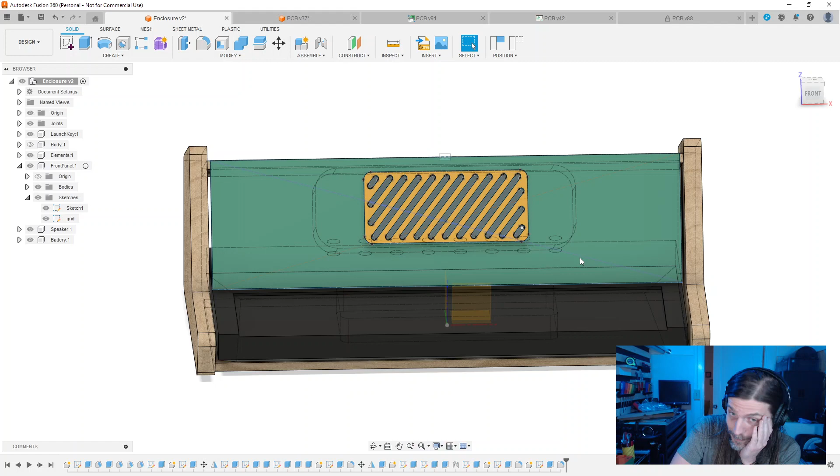We also have giant negative spaces on the side. This is also just clearly not big enough, right? In terms of the speaker placement, this speaker grill needs to be much larger to actually cover the area.

So we'd probably want some kind of element along the bottom. Maybe there's just a strip of the same yellow along the bottom or something like that. This gets wider. And then what?

I mean, it's definitely just much less elegant than it was previously, sadly, but could probably, like, part of that is just sort of an optical proportions thing at a certain point, right? So...

Probably you could... what are we doing here? Just do something like this. It's very big.

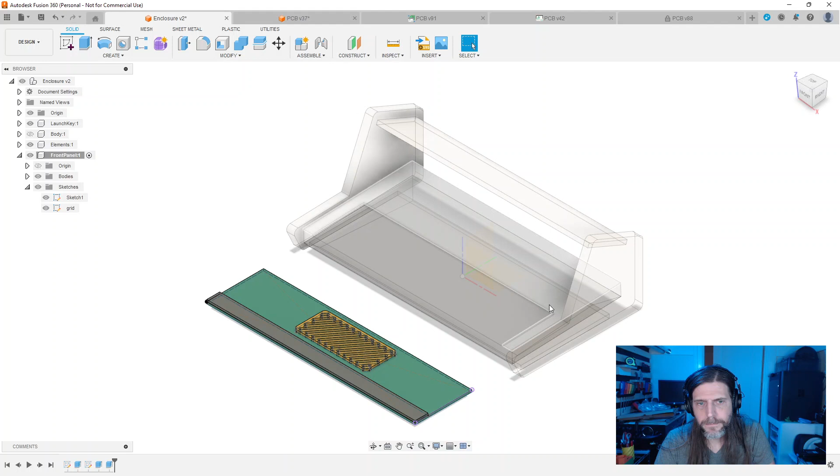What? Look. When extruding this part, add this as well. Uh-oh, do we lose our... And just make that a color.

It's not the worst. This is wider. There's some little design detail or something there. Okay, so that, I mean, God, we're definitely making things still hard for ourselves, right? We've got to fix the speaker to the upper inner portion of this somehow. Somehow.

Are these adhesive? That would be really funny. They're not, it's just a little cover. Which, you know, I could think of ways, but then we're probably designing brackets or something, which is definitely harder than just a frickin' shelf.

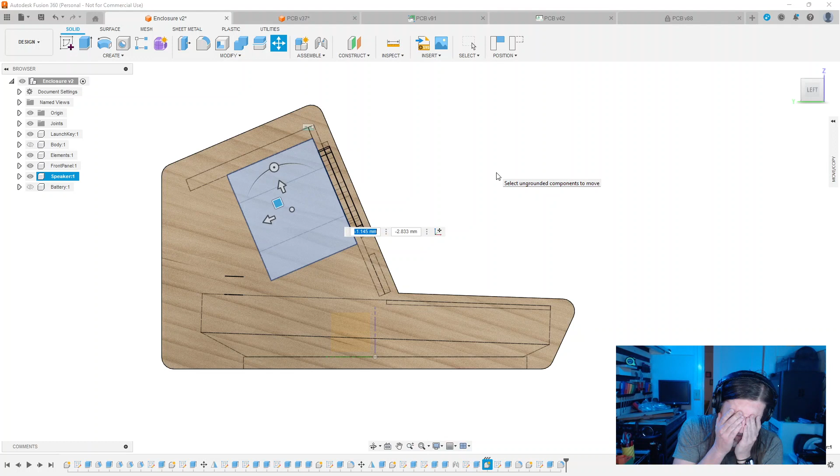Question then is, how do we fix this? Is it attached to the front somehow, or is it attached to the upper, which probably makes the most sense? It's attached to this in some way, which is not the hardest thing, but it's also just another thing. Maybe just 3D printed brackets, something. Or VHB—maybe it's just VHB.

We still have not really addressed the battery. The shape is kind of cool though, right? Cute little guy, cute little friend. I don't know why that width is wrong, but oh yeah, because we added some breathing room.

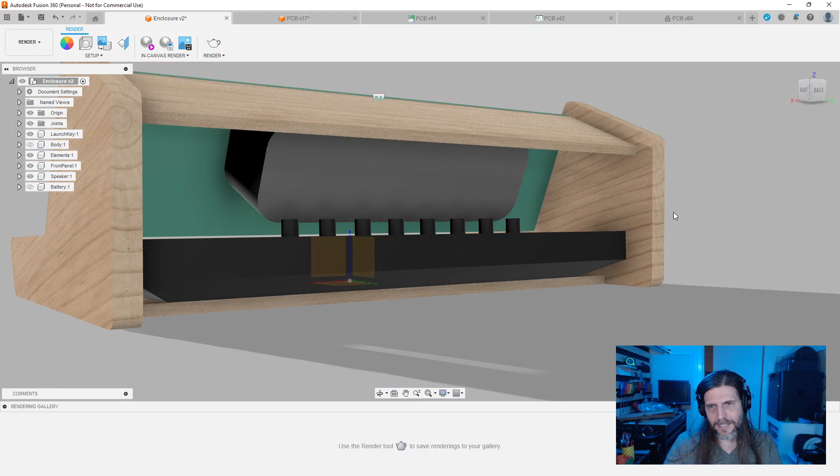Okay, decision time. Do we still have things to address with, like—oh God, I already forgot about that, the actual joinery, we have to figure that out. This actually makes that very easy, I think, or relatively easy. We just have some kind of little interior feature that this stuff sits on, so that's not too bad.

But the battery, and possibly the Raspberry Pi. I mean, there's definitely a Raspberry Pi, it's just which one, how big is it, what are we doing? The Raspberry Pi is almost the size of the speaker, actually.

Kind of interesting. Oh my gosh, am I reconsidering this whole thing? I can feel it happening. I can feel my brain reconsidering this entire approach. I can feel it, I can feel it, I can feel it happening.

Oh my gosh, kind of keeping the thing we have here and just getting rid of the keyboard. What's wrong with me? Why am I like this? You know what I mean? Like basically just this thing, but don't include the keyboard, make it smaller.

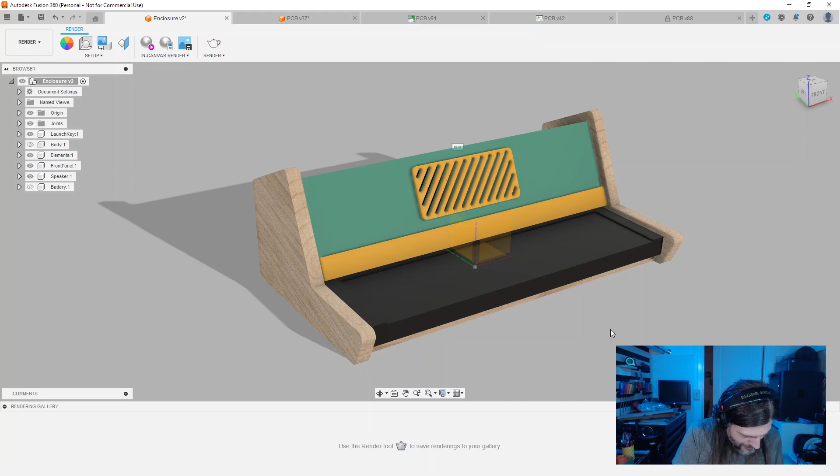We just build it in such a way that there's room for the battery, there's room for everybody. Shoot, why am I so indecisive? Why am I like this? Why am I like this? Shucks, okay well, there's some things I'm generally pleased with.

The original notion of including the keyboard was because I was so indecisive about an enclosure that didn't include the keyboard. But now the keyboard is proving annoying.

Well, that's another thought, actually. Okay, let's just make things more complicated. Oh my gosh, okay—doesn't Elektron or somebody have a really cute little buddy? I was just imagining, what if we had a keyboard that did not have all the other stuff on it, and how much easier that would make this.

Sorry, Arturia, that's who I was thinking of, who makes the beautiful ones. But if I didn't have the upper portion of this, which is part of the battle here, that is definitely making this obnoxious—if I didn't have to worry about that. Oh, those Arturia keyboards are beautiful. But I kind of don't want the full pad, I guess.

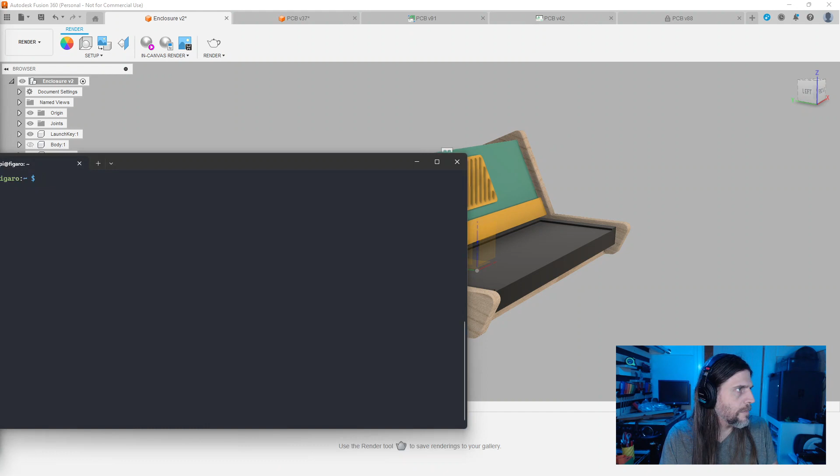Should have just set this up properly for SSH and then. Okay. What am I doing? Where am I? Here I am. So I'm gonna pause on that and think about what I've done.

Raspberry Pi, USB audio, ALSA. I just don't remember how to do this, but I think there's a... Can we do this? Cat /proc/asound/cards. Great. Awesome.

So we have a Gembird USB speaker. So I feel like there was a trick actually where all you have to do is you just disable the headphone device and then you were good.

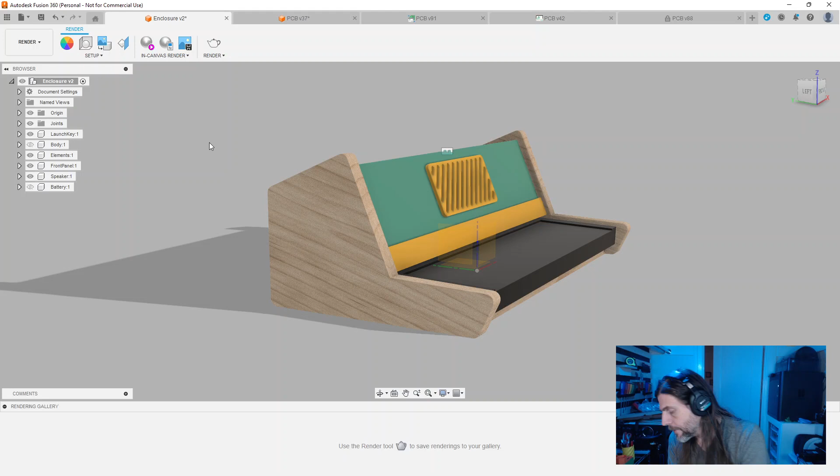And then the front panel is just a little speaker. Tempting.

Okay, anyway. It seemed like it worked, actually. I'm shocked.

Front, left, front, right, front, left, front, right, front, left, front, right, front, left, front. Like the volume buttons don't do anything, but I don't really care. Front, left, front, right, front, left, front, right, front.

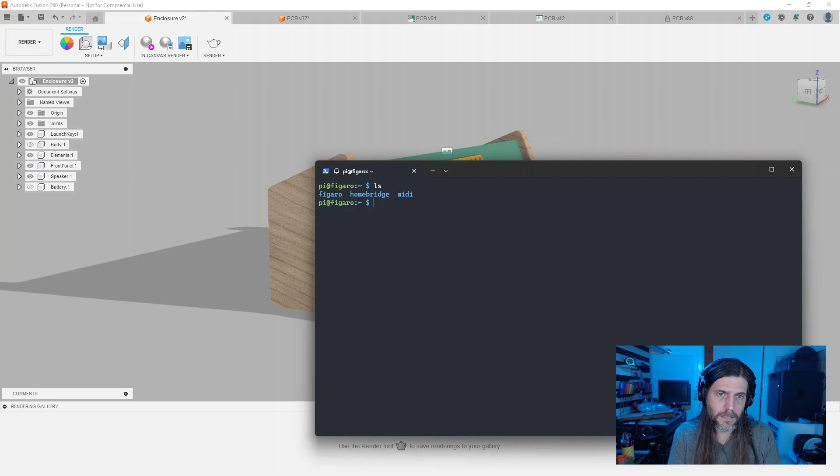Okay, is the Docker stuff running? Homebridge is, but my Figaro, or sorry, my Fluid Synth stuff isn't. Wait, I didn't really want to connect to it.

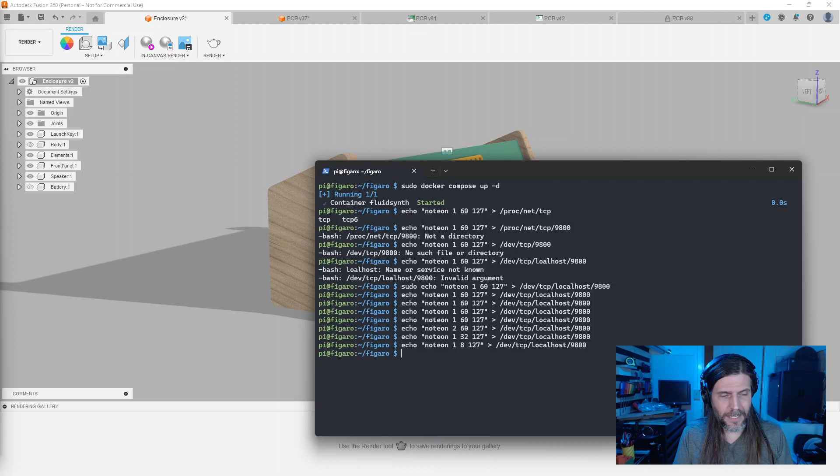I'm realizing a flaw, perhaps, in my thinking, is that if I want this to play music, I need to send the MIDI both. Did I have a solution for that? Now I can't remember if I had a solution for that. I need the MIDI to go both to Fluid Synth and to my server. How do I have to do anything to do that? Probably. That doesn't seem like a thing that would just magically happen, but maybe it's magic.

You know, like, how do you do this? Oops.

So if we go here, we do LSUSB. Do I see my keyboard now? Yes, I do. Okay, I have to step away for a moment, be right back.

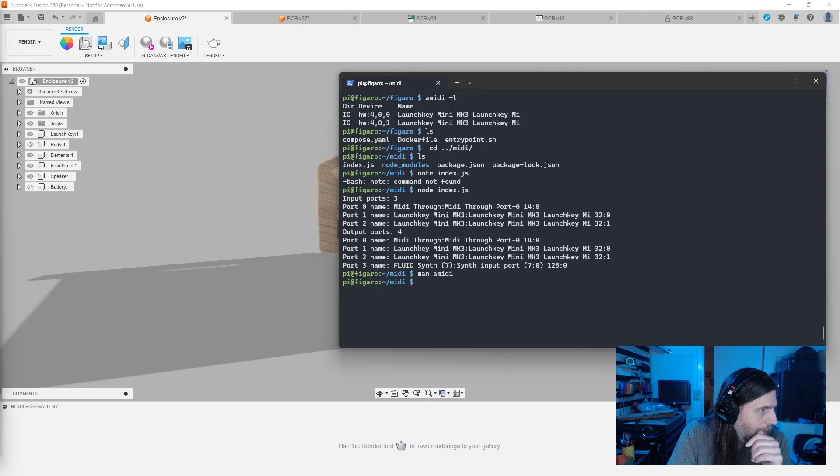How do you connect two things with Alsa MIDI? Especially since AMIDI can't seem to see it. Can you, like, how do you connect? I still don't know how to do that, the routing. aconnect, is that the thing?

So we need to connect this to this, is that what we do? Hey, this person has a Launchkey Mini. Look at that, this person wants to. Wait, that's not what we want to do.

Show inputs, show outputs, and list them. So if we said like show the inputs, let's do these separately. No, I said separately. Let's do these, those are the inputs, these are the outputs. Nope, I keep confusing myself. These are the outputs, these are the inputs.

Well, why is that true? Why would it be that when I list outputs, it shows this input port? Maybe that's a place you can output to. Anyway, we want to connect sender to receiver. Sender being 32.0, to receiver who's 128.0. Doesn't sound right. It worked.

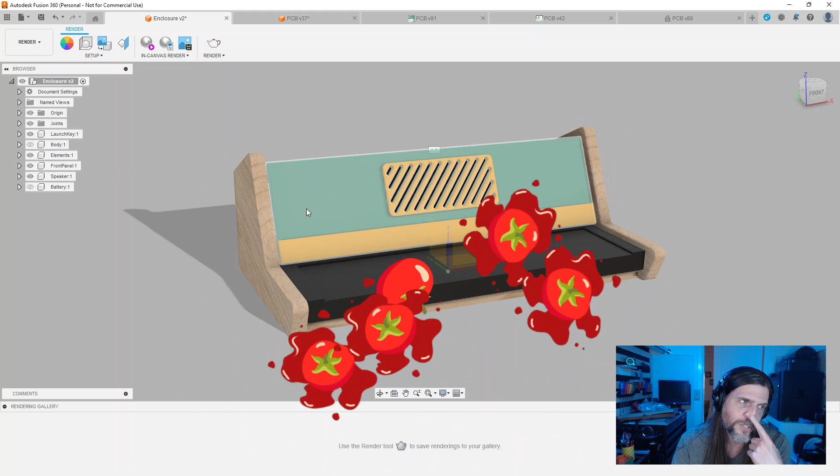We'll shrink it just to dimensions that make sense for what we want to be in there, which is definitely a Raspberry Pi and another thing, in this little speaker. So there's a Raspberry Pi in there, and there's a speaker in there, and then there is also battery is a maybe. The battery doesn't actually seem that important.

If this is not going to be a self-contained little thing, I don't think we need a battery in it. But if we don't put the battery in this, then it's not a problem anymore, and we could just build this. So I'm incapable of making decisions, is what we're really finding here.

I don't think we do the keyboard. I think we don't do the battery. I think we do just the speaker and a little box. I think that's what it is. I think these little legs get shorter, but still kind of keep some of those little details. And then this thing is just a box.

Well, maybe we can't make the legs shorter. Actually, it depends on where the box goes, because if the box follows this line, well, it can be up a little. Anyway, we'll cross that bridge when we redesign this thing from scratch for the 55th time.

The question then is, do we want other stuff in here? And that's a question I'm going to ignore. We could put the battery in there and then just have the speaker sit on top of it, and that would be kind of like this height. That little footprint would just be where the battery's set. It's possible. But the other consideration was like other controls or electronics or doodads or whatever, and I just don't quite know about that. Just not sure.